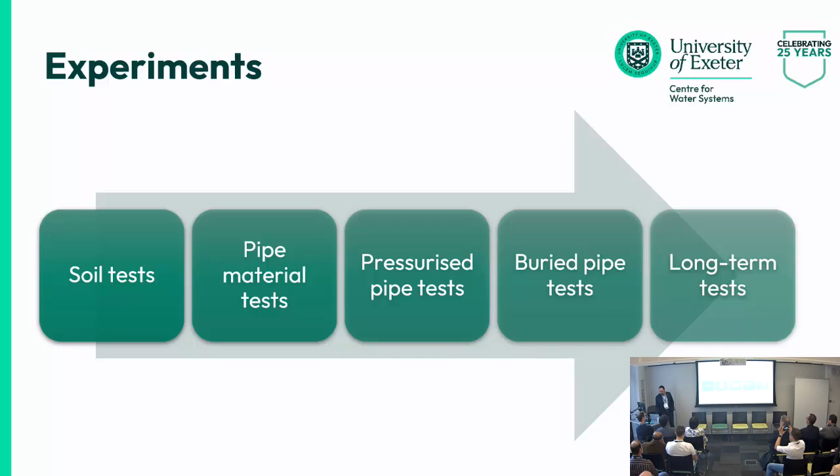We started with experiments, and in the first part we did some experiments on soils, pipe material, pressurized pipes, buried pipes, and then long-term tests. We started with tests on soil. We did some experiments to understand different mechanical or geomechanical properties of the soil, like soil gradation, shear characteristics of the soil, Atterberg limits of the soil, porosity, and different mechanical behaviors of the soil.

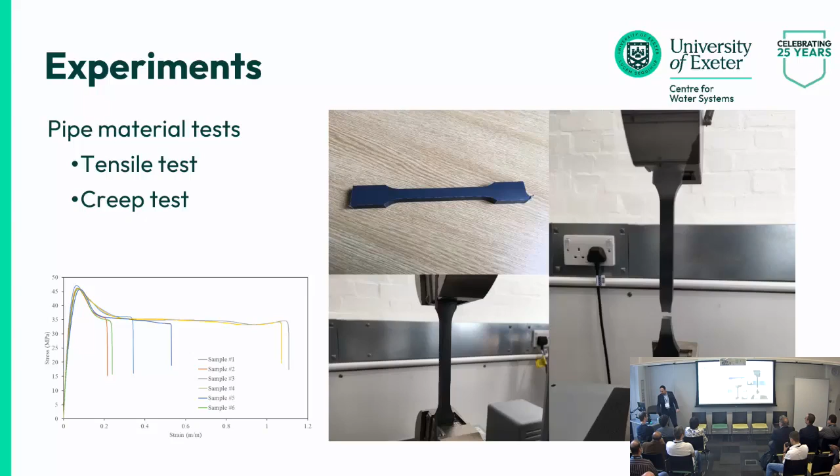Then we did some experiments on the pipe material. A tensile test has been carried out, and a creep test has been done to know the Young's modulus of the pipe material, yield strength of the pipe, and also rupture strength of the pipe. Then we moved to pressurized pipe tests. 4 sensors have been installed on 4 cardinal points of the pipe, and each sensor is able to measure the strain in 2 directions, both hoop and axial, and it can effectively measure and monitor the deformation of the pipe in different directions at different points.

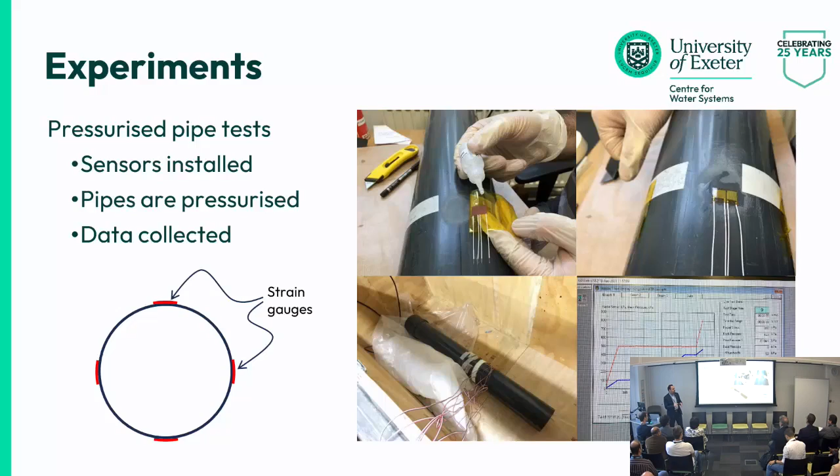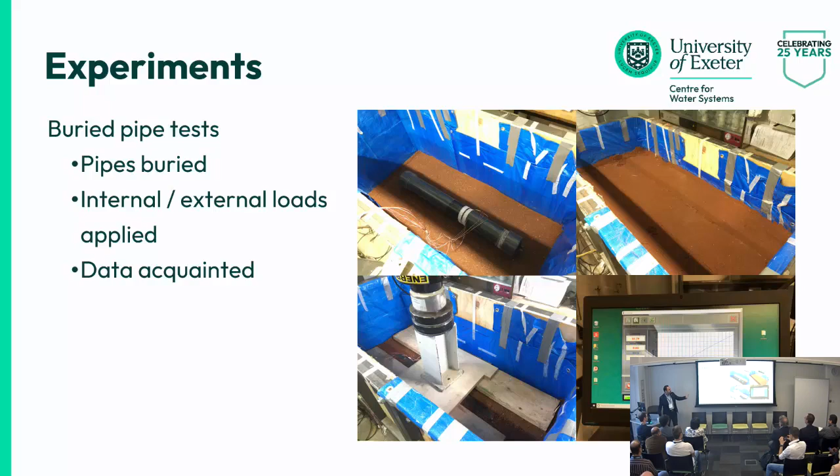The pipes were pressurized from inside, and the pressure increased until the pipes failed or broke, and then the pipes were buried in soil, and different combinations of internal pressure and external load were applied on the pipe until the pipe failed, to see how the pipe behaves when it faces different combinations of loads. And in all cases, the data, the deformation of the pipe, strains on the pipe were acquired. And some extra tests were done.

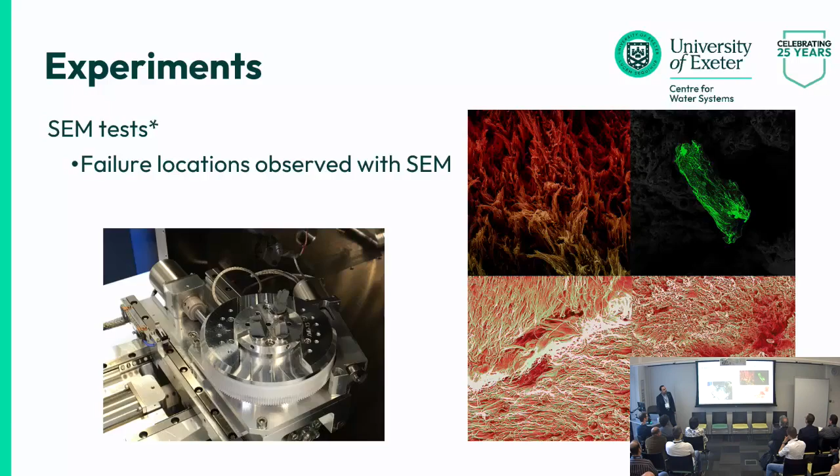The failed points of the pipe were cut and put under an electron microscope to see different failure modes on the pipe. Here we saw a ductile failure mode in the PVC pipe, and brittle failure mode in other failures. And here I have a short movie showing how we did the experiments in our lab in the Centre for Water Systems at University of Exeter.

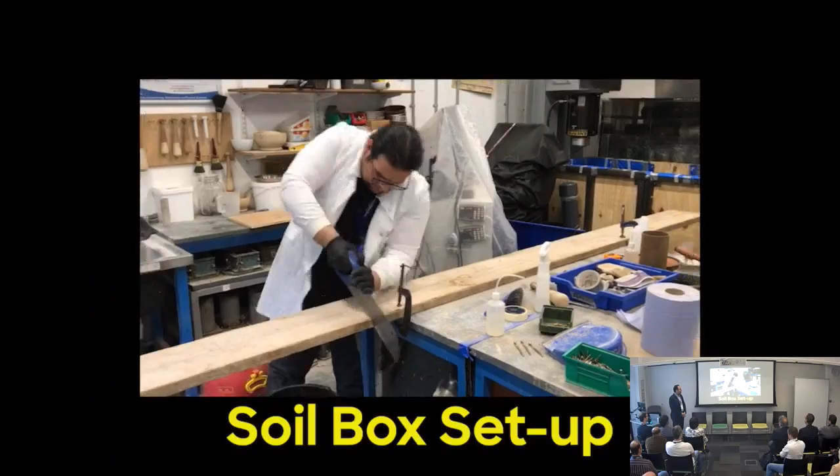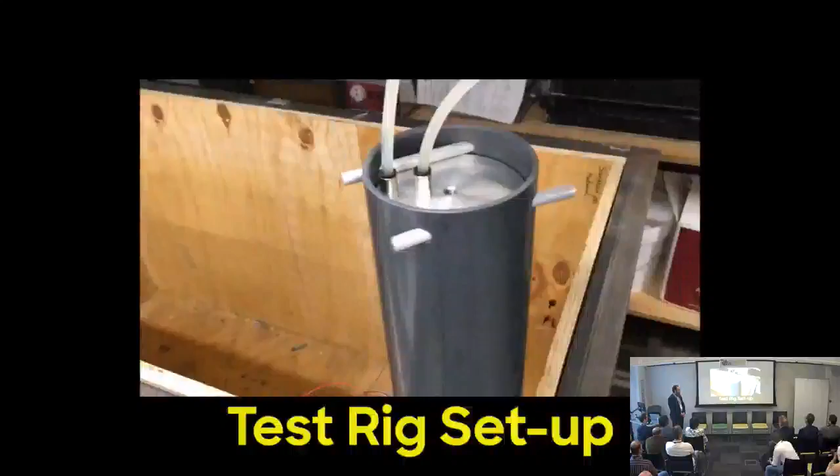We did some experiments on the soil, and here we measured the Atterberg limits. Then we cut the pipe, we sealed pipes from both ends, deployed sensors on different points, strain gauges on the pipes, and then we set up a soil box, and then we pressurized the pipes until the pipes were broken. This is one of the cases where the pipe was broken from one end. It was because of failure in the end cap.

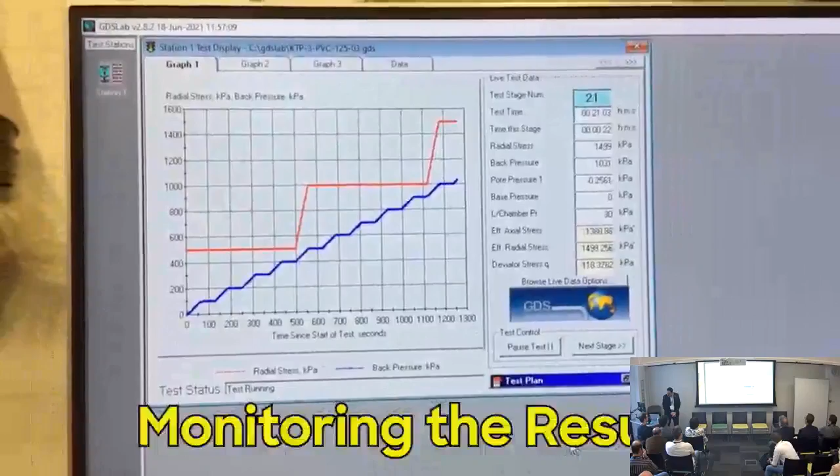And then pipes were buried in the soil, and the pressure was applied on the pipe, on the soil, and different strains were measured at different points. And our dedicated team at the Centre for Water Systems.

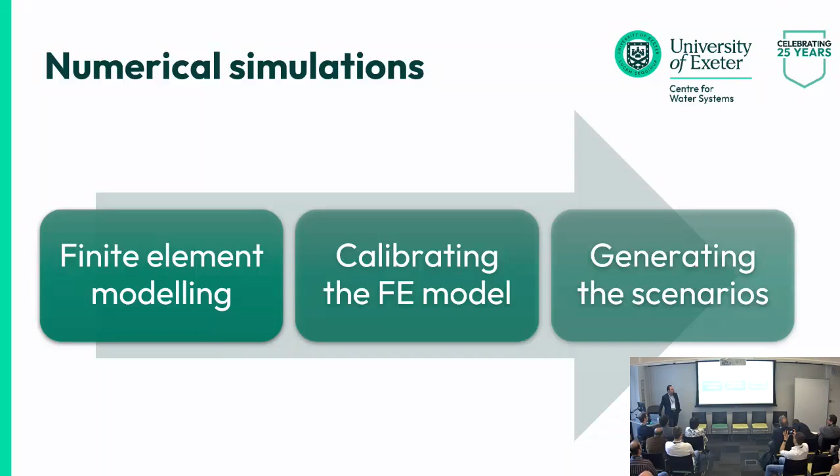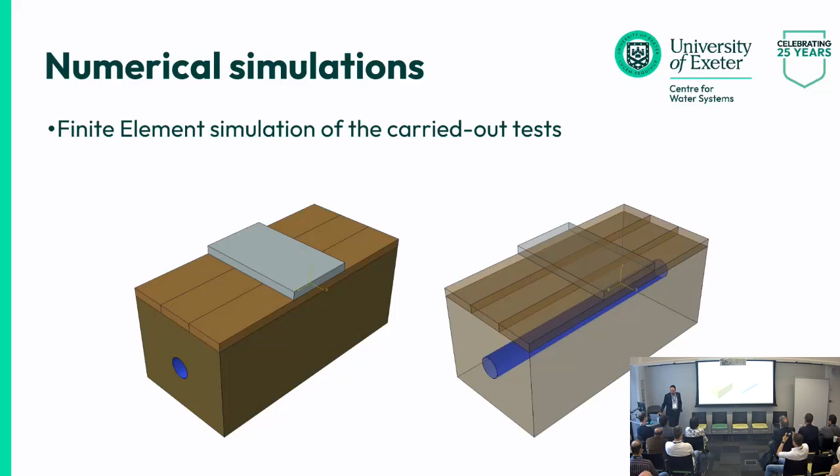Then we moved to numerical simulations. We started with finite element modeling, calibrating the numerical model, and then generating different scenarios. We exactly simulated what we had in the lab in terms of soil and pipe. And here I have another short movie showing how we did the experiments.

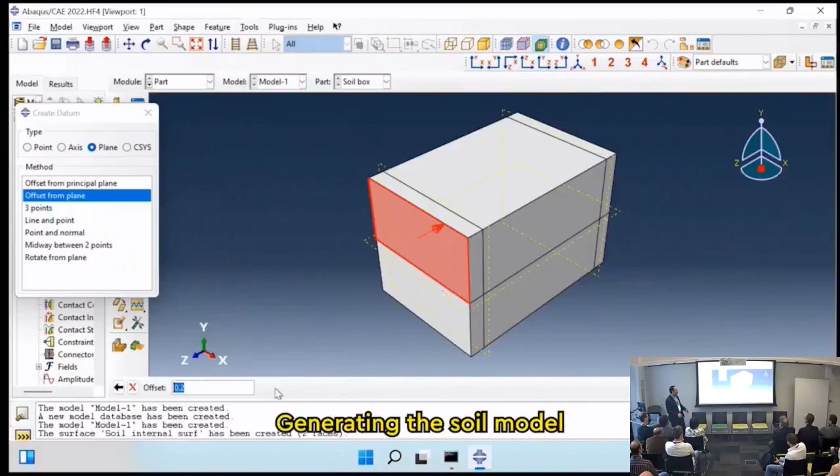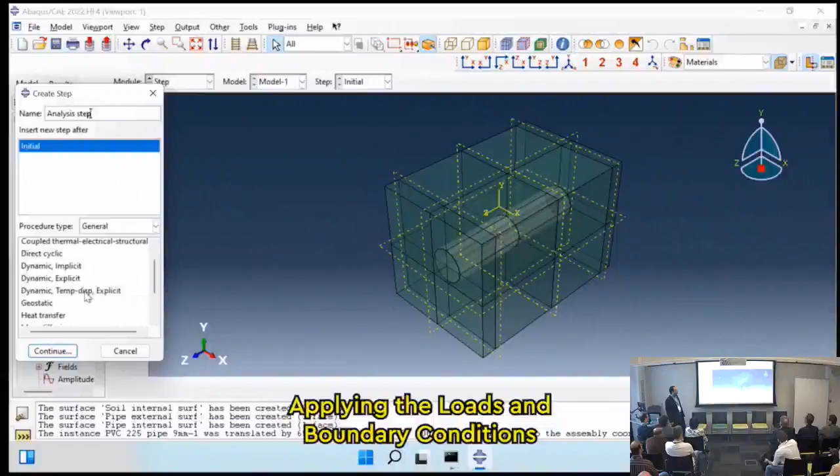The box of the soil box was modeled, the pipe was modeled, and the different characteristics of the pipe were assigned to the model. Then the pipe was put into the soil box. Then pipe is added to the model, and then loads and boundary conditions were applied to pipe and soil, and then the model was meshed.

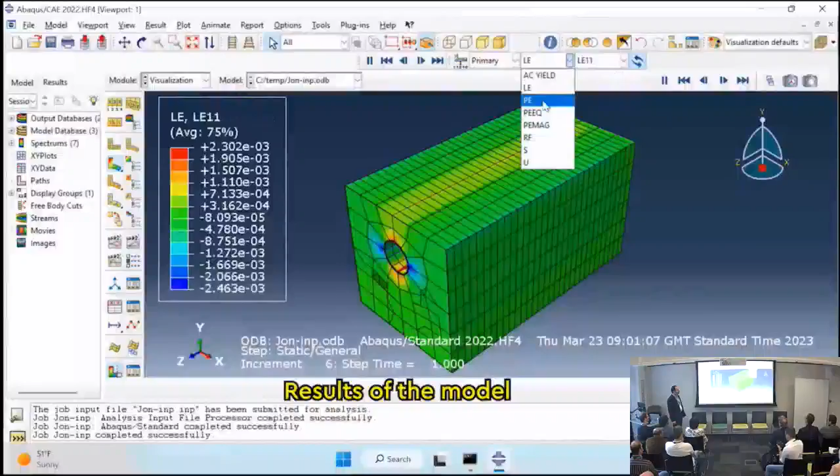Here the model is meshed, and then different parameters were assigned to pipe and soil, and the model was run. After running the model, we had stresses and strains on different points of the pipe and soil.

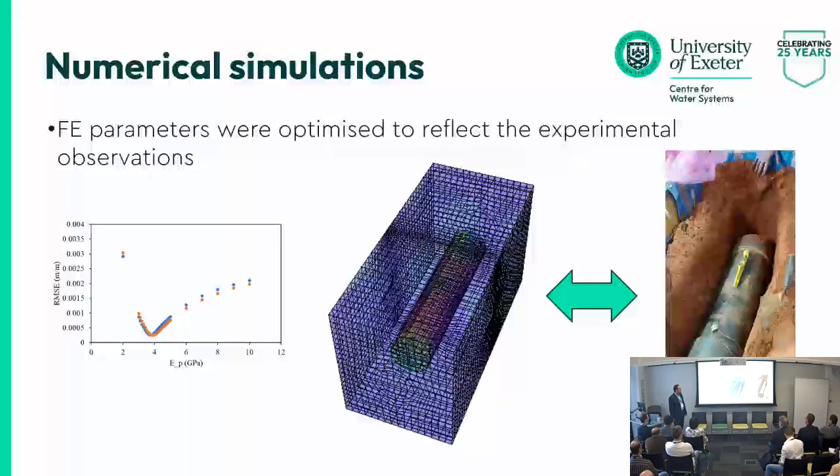Having this model, we were able to calibrate the numerical model with the data we got from experiments in the lab, and different parameters of the pipe and soil were calibrated. Now we have a calibrated numerical model of the soil and pipe, which is ready for the next step.

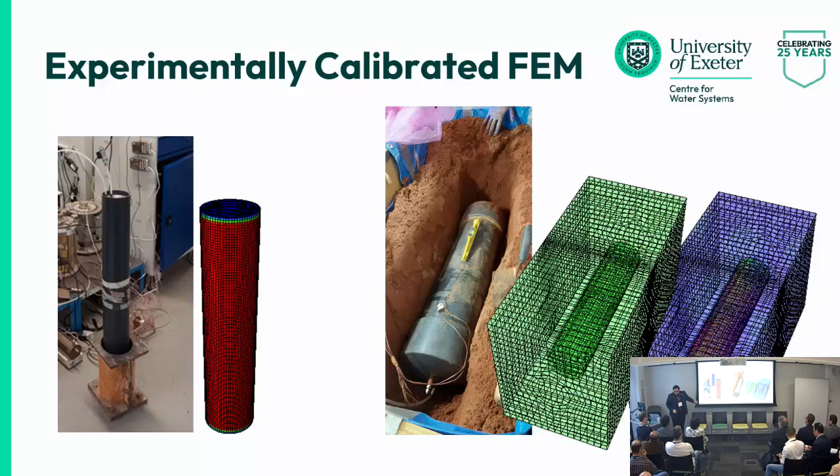We knew that running the finite element models, generating the models is time-consuming and computationally expensive. So we thought we can generate scenarios which could really happen in water distribution systems. So we have different diameters and the thicknesses corresponding to those diameters in the PN10 pipes, and also different buried depths for PVC pipes.

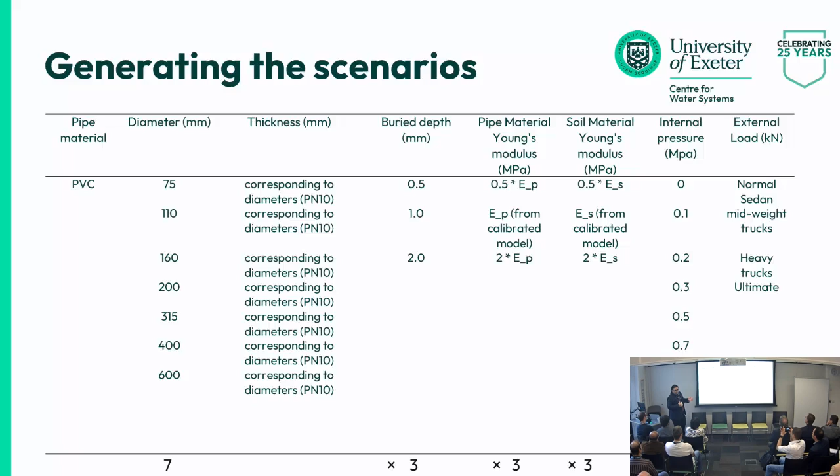Also, we multiplied the values of the calibrated Young's modulus of the pipe and also the soil, so that even if aging is going to affect the pipe, we are going to capture it. And also, we have different internal pressures and external loads. So we generate all of these scenarios, and then we create all of these models and run them. It is a huge time, huge computational expense.

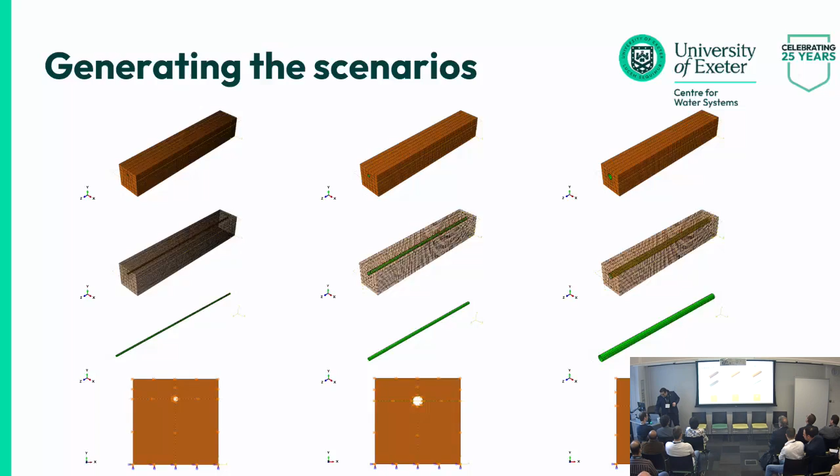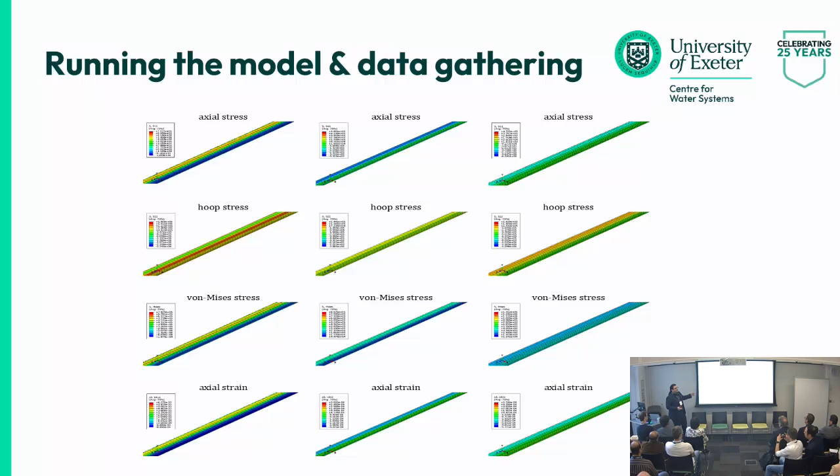And then we gather the data from the 4 exact cardinal points that we had in our experiments. So we have axial stress, hoop stress, von Mises stress, axial strain, and hoop strain in 4 cardinal points. And we got that data from all the scenarios. So we have this data from all the scenarios, what are we going to do?

We're thinking, let's make it a bit fast. So we're looking for the surrogate model, machine learning models, or let's say regression models to use. The first thing that came to mind is the white box one, because we know some of the empirical equations, and I really want to see the difference between the empirical model and the model we are generating from our finite element models.

And also a black box model, which has its own points. So at last we're going to have a surrogate. About the white box, it is obvious we have interpretability, model transparency, and also the feature importance that we can see in the equations. In the black box models, there is high predictive performance and automated feature learning, so it could catch some complex relationships between the features and the outputs. And it is very effective with large data sets.

As a white box one, we use EPR, which has been utilized several times in the Centre for Water Systems. It's a hybrid regression method of a genetic algorithm and least squares regression. So we use the genetic algorithm to optimize the coefficients of relationships. We used the data, and the main regression structure we thought of was a function using the features that we had the data from.

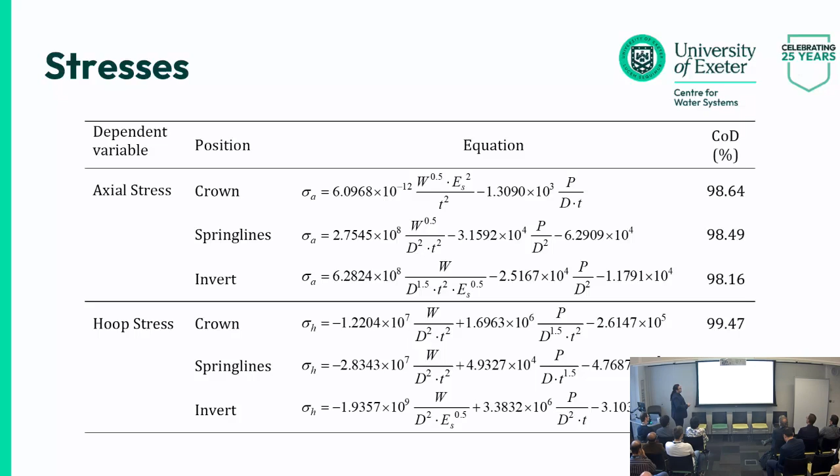So, we train the model. The model trained on the 3 cardinal points, that is crown, spring lines, and invert, for all the axial stress, hoop stress, axial strain, hoop strain, and we got the equations. As you can see, for each cardinal point, we have an equation: if you put the inputs, the features, you will get the output of the axial stress or hoop stress in crown, spring line, and invert, and also the coefficient of determination, R squared, is acceptable.

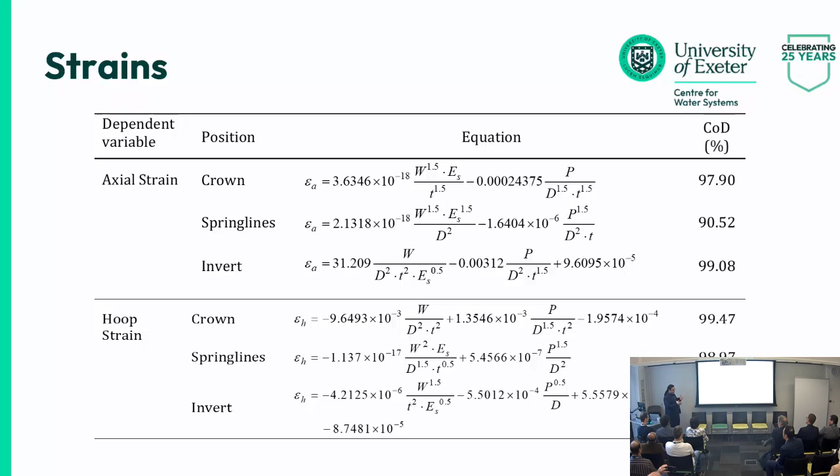And also for the strains, we have the same, and we don't have time to talk more about that. But when it is transparent, we can say how the effect of each feature that we use in the model or the experiments is affecting the output.

And also, we have this extreme gradient boosting, sorry for the name, it is the name. And we use this model, and we split the data for train and test. And the test shows good results, but this time there are several outputs, several inputs in the same model. It is not like EPR to have different equations for different outputs.

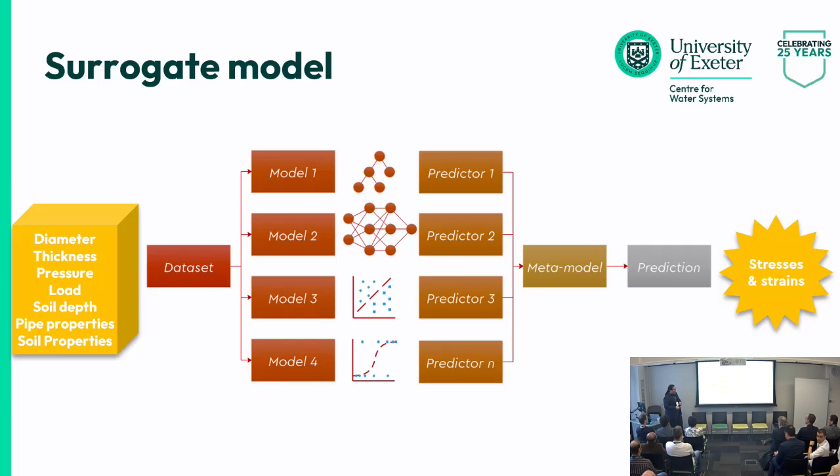Later, we have the surrogate model. So in this case, you will give the input features, and the input features go inside the machine learning, or let's say the surrogate model, and you will get the condition of that pipe by getting the strains output from the equations. So later on, it will come to the in situ data, which I'm going to ask Milad to come back and continue with.

Yeah. What we have presented up to now is what we have done in the project in the last 2 years, less than 2 years. But the next step is about gathering data from live pipelines in the water distribution network and monitoring them to develop a digital twin. We are going to gather strain data, pressure data, external load through load cells, and soil moisture, any parameters which could be effectively measured in water distribution networks.

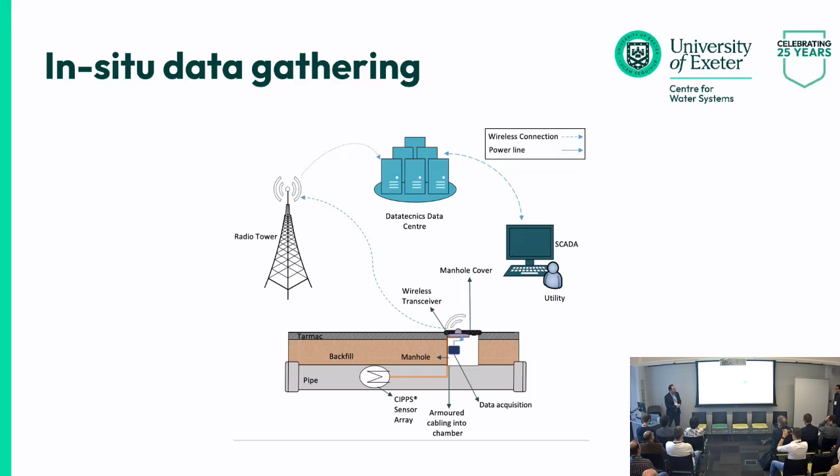And yeah, the whole system could be something like this. The parameters will be measured on the pipeline, and then the data will be transferred to a cloud, and the cloud will send the data to our machines in the university or in the company, and then we will have all of the data in our machines to monitor the pipelines in real time.

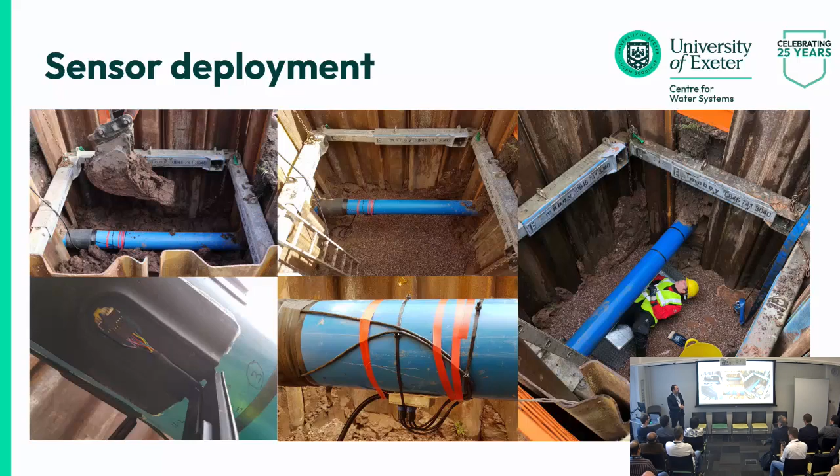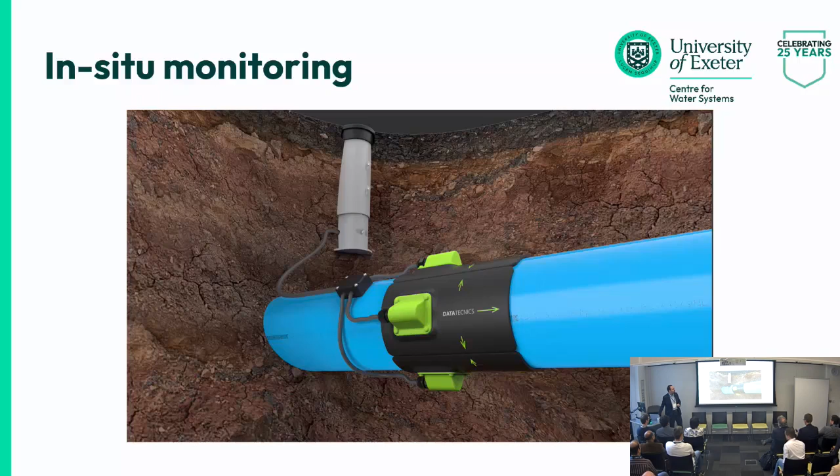And fortunately, the company we are working with, Datatecnics, has a lot of experience in deploying sensors on pipelines in the UK. This month we are deploying strain gauges and other sensors, pressure gauges, on pipelines in one of the utilities in the UK. And as of next month, we will be able to have those data in real time in our machines, and the next step would be developing the digital twin. And the company benefits from a high-tech solution for deploying sensors on the pipelines.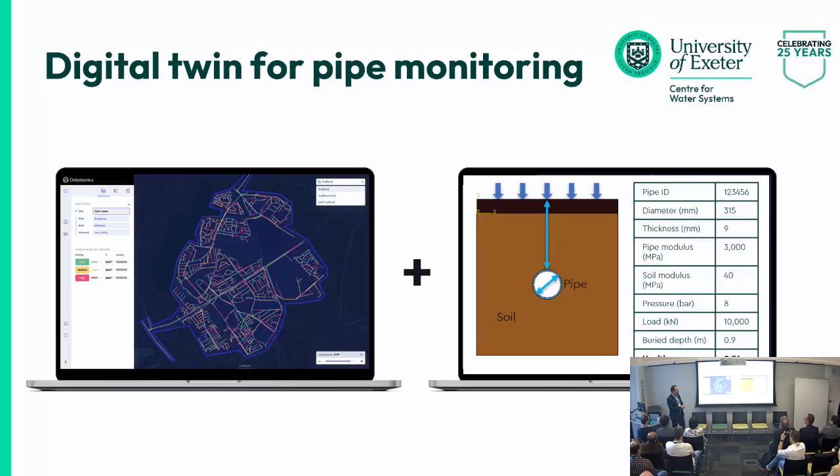And the next step is about developing the digital twin for water pipelines. Having this model, we will be able to monitor the pipes and have all of the data about the pipe: diameter, age, length, thickness, depth of the pipe, everything like that. We will have a health condition score for each pipe, and we can monitor it day by day, and we can predictively replace the pipes before they fail.

So we can shift from reactive asset maintenance to predictive asset maintenance. This is the next step for the remaining 1 year of the project, of the case project. Thank you very much.

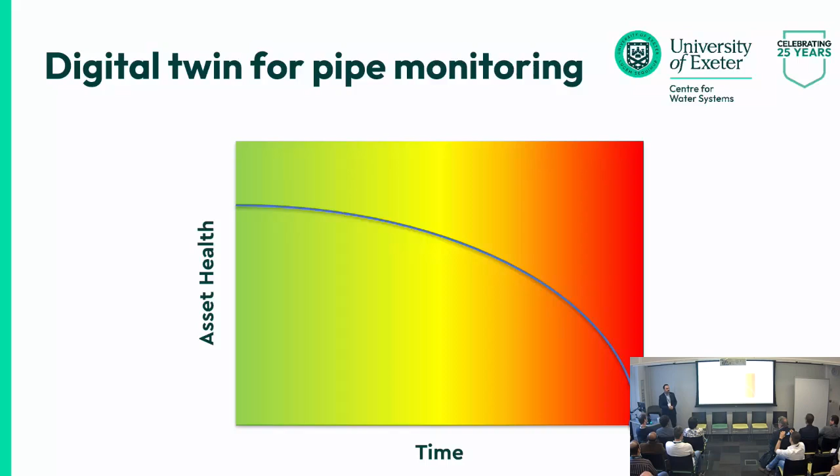How general are your results if you only worked on plastic pipes? We started with PVC pipes, but at the same time we are doing tests on ductile iron pipes, and the next step is cast iron pipes. So we are trying to cover a wide range of pipe materials in our project.

Okay, looks really great. Have you looked into similar work abroad? There is just a little research done exactly on this subject matter, but yeah, we had a literature review on this part, and also we are happy that we saw that KWR did something in this field.

Model that... yeah, exactly the same. Thank you. Yeah, thanks for the presentation.

You went through the digital twin rather quickly, and I was just wondering, we all use this term in a very loose way, and different people mean different things by digital twin. How do you define a digital twin in your case?

Actually, the definition of digital twin is a bit broad. But when we're talking about the digital twin, it means that it should be dynamic. And it should be representative of the same thing in the field, so we could do some non-destructive tests in our computers to look at what is going to happen to that pipe or to that asset

So our next speaker is Matthew. Matthew's research has also been funded by industry, and the focus is on leakage prediction. So my name is Matthew Hayslep, and as Raziyeh just said, I work with South West Water to use machine learning to look at DMAs and leakage primarily.

So, some of the ways that we typically try to understand leakage that we want to look at from a data perspective. We've got minimum night flow, which you can generally see only at an entire DMA level, but the data is everywhere. There's lots of it, but it also includes legitimate demand. And then we've also got pipe failures, which are very pinpoint locations, but they're rare events. Sometimes you might have a whole year where the DMA doesn't have any, but there's still leakage there of some description. And it's also only what we can already detect, whereas we want to go beyond and see what there is that we don't know.

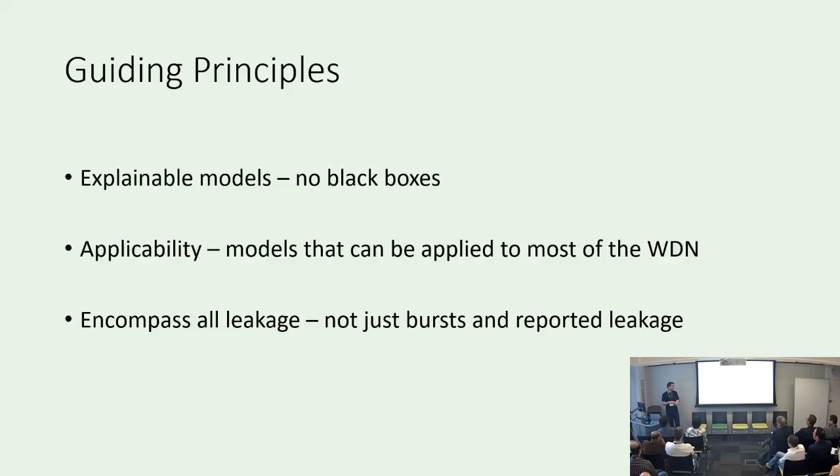And there's a couple of guiding principles for our work. We want to use explainable models because we're working with industry. We want to be able to understand the models that they're using. They obviously have Ofwat that they need to report to, and we want to make sure that what we make is applicable to as much of their network as possible, not just for one particular DMA, one case study. And we want to not focus just on bursts and reported leakage, but possibly also unreported and background leakage as well.

So, with that in mind, some of the data that we use, it is animating, excellent. So we have about 800 real-world DMAs from South West Water, about 11,000 kilometres of pipe. We look at minimum night flow records for a whole year. Now this is normally time series data, but for us, the way we started was to start simple. So we just reduce that down, basically take an average minimum night flow for a DMA for a whole year, and we'll get to that in a minute.

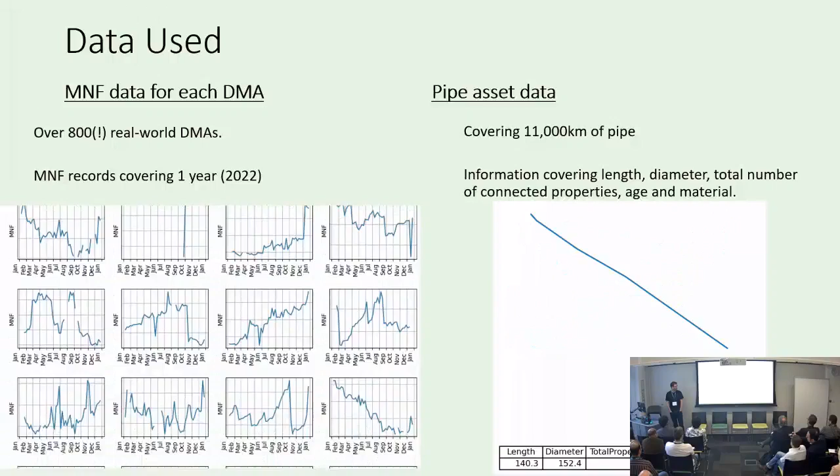And then, for now, we're just looking at pipe asset data. So we've got length, age, diameter, material, and total number of properties that are connected to that pipe as well. And what we want to try and do, like I said, is just starting simple, try and predict some average historic minimum night flow, right?

If we can use the asset data to sort of say, this is roughly how much minimum night flow we're expecting, then we can kind of explain some of the differences. Why does this DMA have more minimum night flow than this DMA, right? And then we can try and drill down further into leakage.

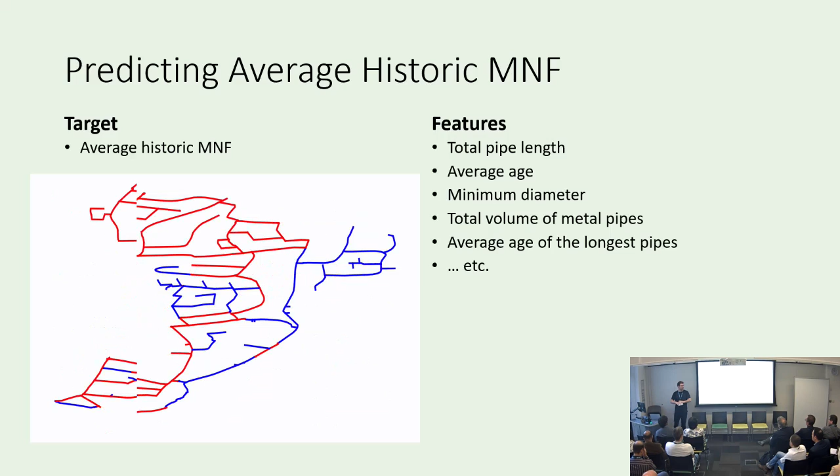So what we started with was making a whole bunch of features because we start with the pipe data, but the thing that we're trying to predict is at this DMA level. So we look at things like total pipe length, average age, minimum diameter. We made something like 200 handmade features to try and do some machine learning on. And so the first attempt that we get looks something like this. We trained a very simple linear model, so it's nice and explainable.

So as a follow-up to this, we did a piece of work with genetic programming, where we wanted to try and find some kind of minimal set of features that we could use to do the same experiment, basically. And we got very similar results with only these 5 features. And we won a Best Paper Award at GECCO a couple of months ago for that work.

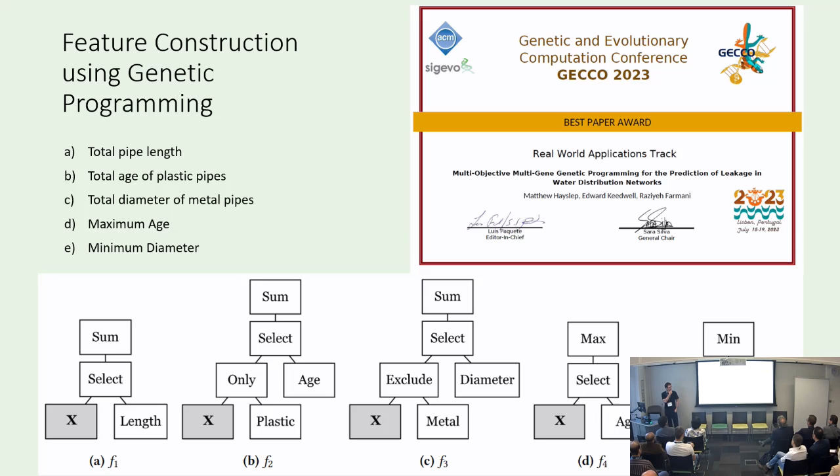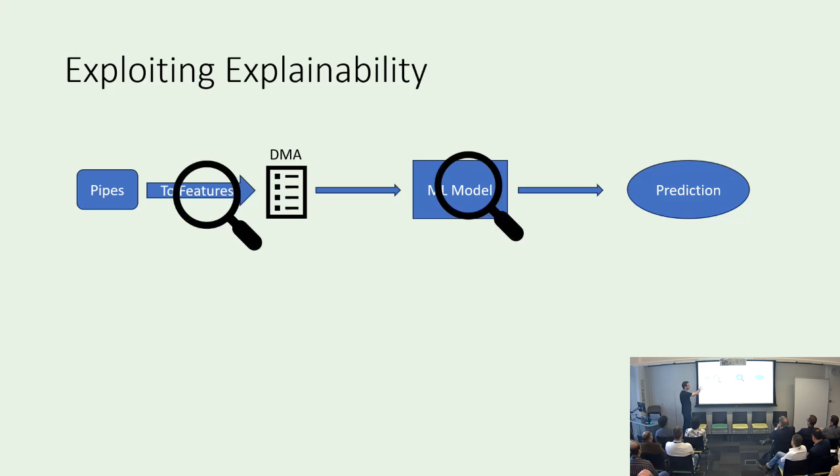And this brings me on to the explainability. We wanted to try and exploit this because we know exactly how we go from our pipe data to our features, and we know exactly how we go from our features to our prediction because we're using a linear model. And can we exploit that to improve the capabilities of what we're doing? So we kind of combine this to say we know how responsible each pipe is for each feature, and we know how important each feature is for the prediction.

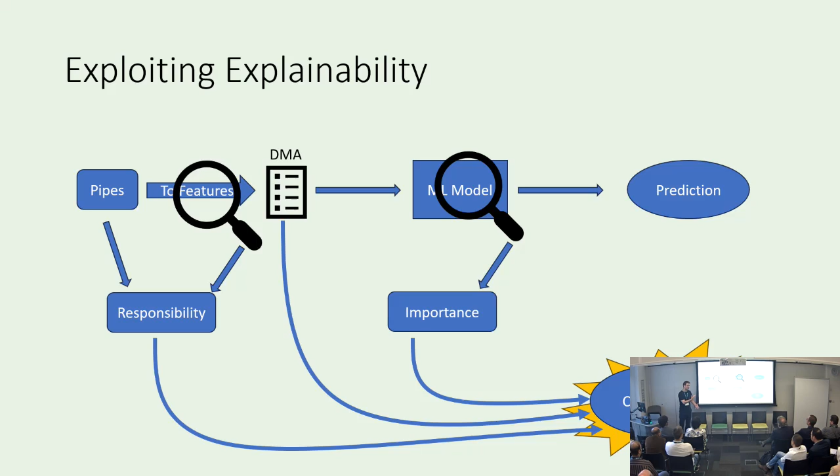And we combine that into what we call the leakage contribution score, which is a number for each pipe which tells us how much it's contributing to the leakage in a DMA. And the convenient property of this is that if you sum up the leakage contribution score of every pipe in the DMA, it's roughly equal to the original prediction.

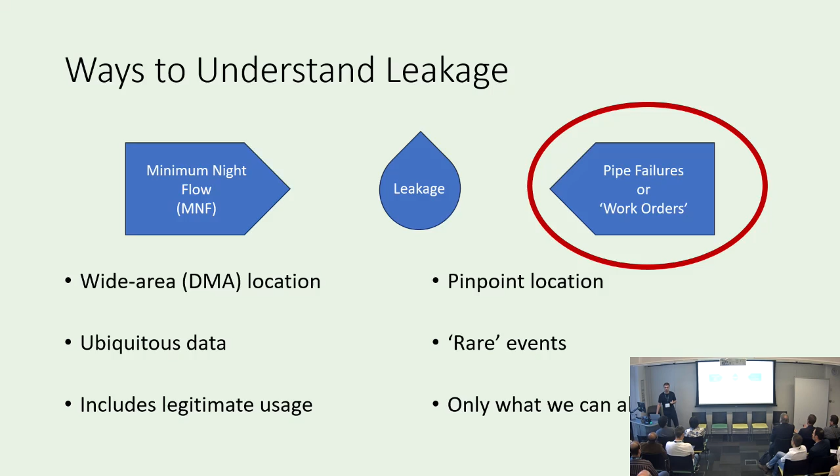But how do we test this? Right, we've got a little bit of a problem, so we go back to pipe failures. We look at repairs and replacements because they have pinpoint locations, so we can attach them to pipes. And we do a classification problem now. It's a different machine learning task. So was a pipe repaired or replaced in the same year that we're looking at the minimum night flow? And then we can use this leakage contribution score as a comparison to other models that we've made.

So we wrote a paper about this, and then immediately I went back to this kind of mental model that I had, and I thought, what if we just scribble all of this out? And what if we can just go and skip all of that part and go straight from pipes to leakage contribution score, basically.

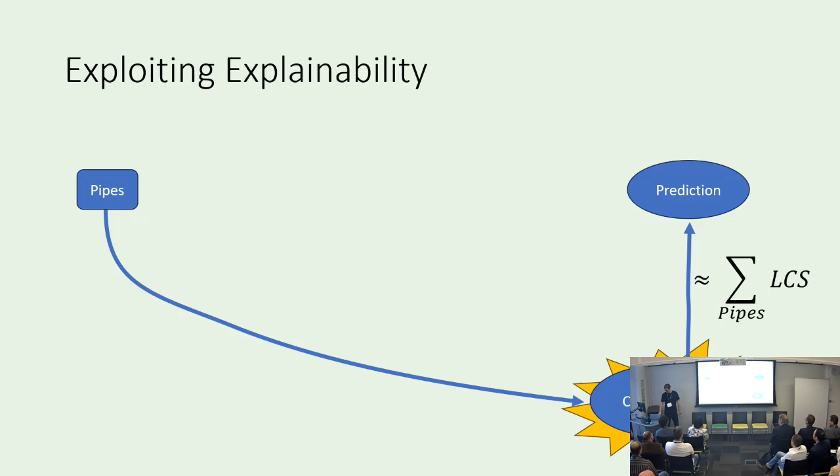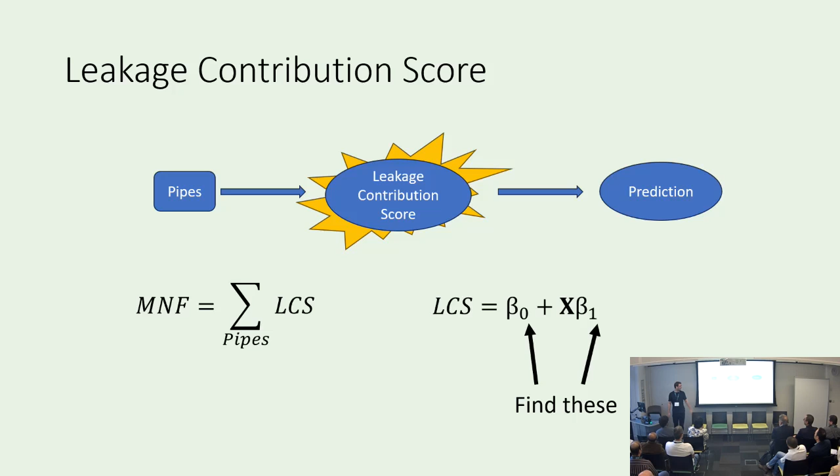So we kind of formalised that and said, okay, what if we say the minimum night flow is exactly equal to this leakage contribution score that we want to find for each pipe, and then we say, okay, we'll keep it simple for now. Leakage contribution score is equal to the linear regression equation. Nice and easy. Now, it's a lot more complicated finding those coefficients than it might seem at first glance. If you want details, poster number 6.

But it worked. The minimum night flow predictions are not quite as good as the previous model. As you can see, we've lost about 0.2 in our R-squared, which is quite a lot. But I think that's mainly because we're losing some information. Instead of looking at the whole DMA, the model's now looking at each pipe in isolation. So you're losing out on relationships there that we want to try and capture later on.

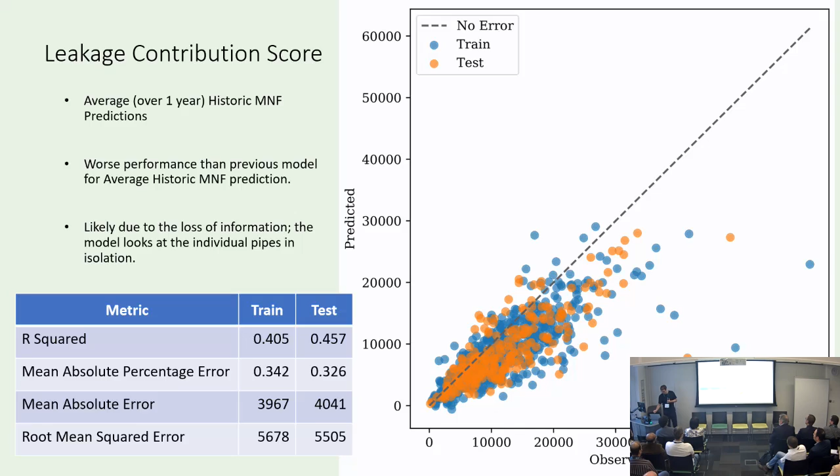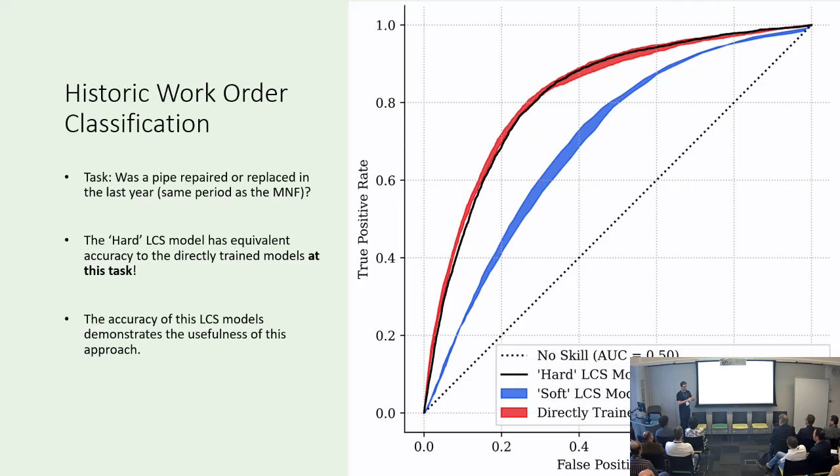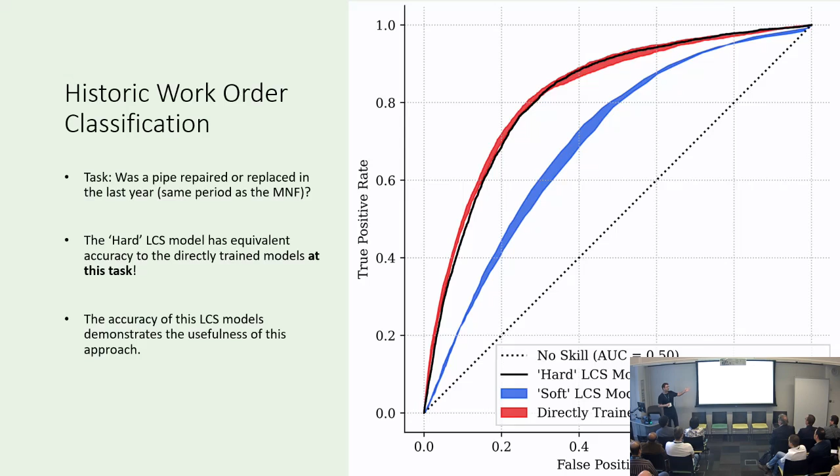However, the black line here is our ability to now predict pipe failure, right? So we're now as good as models directly trained to do that problem. Not only that, we're actually, strictly speaking, predicting how much minimum night flow each individual pipe is responsible for in a DMA. So we've managed to kind of increase the resolution in a particular way. And really this is our only way of validating whether or not we're actually doing that, because it's difficult to measure.

So I feel like I've gone quite quickly, because this is my summary: we've been able to essentially go from just minimum night flow to create a model that can predict both minimum night flow and pipe failures. And that's obviously important for areas of the network and DMAs where you don't have many pipe failures, but you still have leakage and you still want to know what's going on.

So I expect many questions. Yes, please.

Have you got any information about whether people have opened up pipes and tested them for background leaks? Do we have any idea, is it most pipes have a little bit, or is it just some pipes? Do you have any sense of what that looks like? Yeah, my understanding is that most pipes have a little bit, but it might be tiny little drips. I can't think of the right word, but it's just leaks and seeps, basically, from stop taps or junctions and seams and things like that.

And then maybe that correlates with age and pressure and a lot of other things that we're not looking at the moment. So I would have thought that most of the pipes should have a positive number of some description. It should all contribute some amount, even if it's very small. And this seems to work with one of the most important features in basically all the work, which is the length of the pipe. If you've got more pipe, you get more leakage. It's pretty obvious. But that backs up the thinking that you essentially have a per meter amount of background leakage that you should expect.

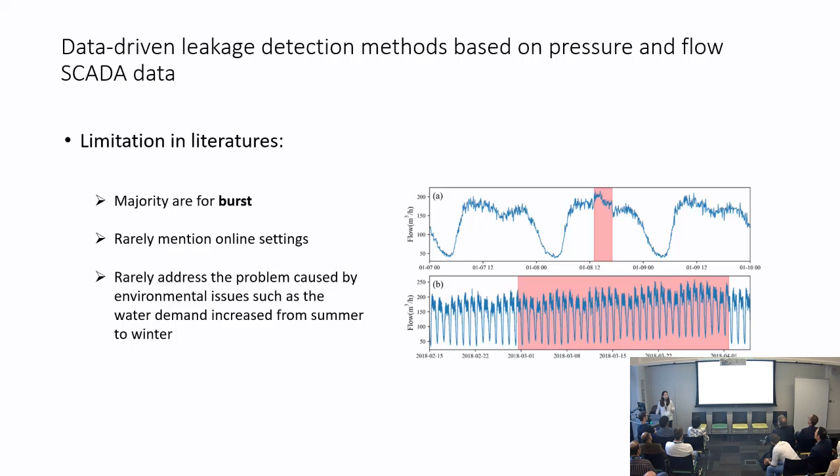So how to detect it? Not to mention that there are global trends in the data itself, for example, water demand changing between summer and winter. I sincerely apologize for that. And this can also obscure the existence of a gradual leakage event.

So our first work, published early this year in the Journal of Hydroinformatics, is based on a statistical method and a purely online framework to detect these gradual leakage events. The online leakage detection system is based on a statistical method called the EWMA-enhanced Tukey method, and involves robust statistics, which are robust to noise and uncertainties in the data. It can also adapt to the time-varying characteristics of the flow monitoring data, such as demand increasing from summer to winter, as we mentioned before.

And this method has three subsystems: the pre-processing, online detection, and also a feedback control to control which part of the data is what we should use to update the model and which part of the data should be abandoned.

So this is the results, and we applied our method to a synthetic case study, which is the L-Town network published in 2020 in CCWI. It should be noted that even though this is a synthetic data set, this network is created based on a real town in Cyprus. So every node has a year of demand pattern with lots of uncertainties and noises.

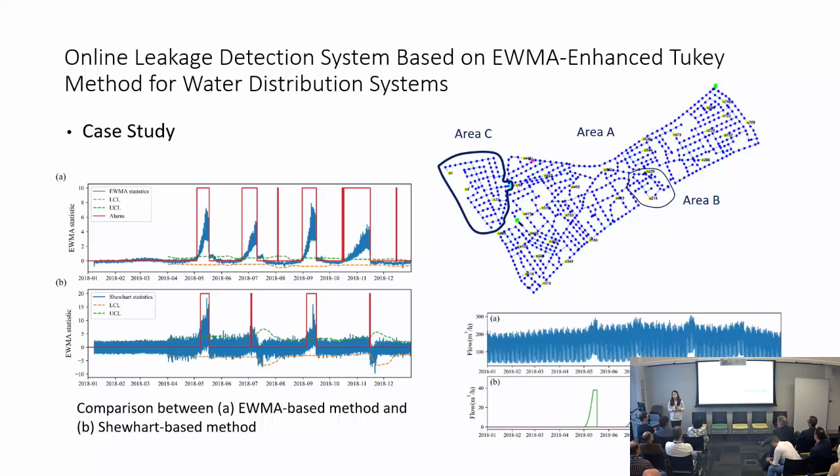The results show that the proposed method has highlighted the existence of gradual events and burst events, and also the time-varying threshold setting strategy has adapted to the uncertainties in the data and greatly eliminates the opportunity of false alarming.

However, due to the limitation of the statistical method we proposed before, it has some accuracy limitation. It's not as accurate as the data mining models, the state-of-the-art methods like machine learning neural networks. So we propose a new method based on machine learning to learn the data pattern automatically instead of using the mean or deviation or quantile or anything else that the statistical method used.

And in order to highlight the existence of gradual leakage events, we first extend the prediction window. Instead of using the traditional 1-point forecast, because it doesn't have any historical memory, you only highlight the existence of the abnormal value at the current time, but it doesn't have a time window memory. So we extend this, and we use a neural network to create a mapping function between the input and output.

For every time step, we generate a pair of observation and prediction, and then we tried lots of distance calculations like Manhattan distance, Euclidean distance, and then we found that cosine distance is the most robust one to highlight the existence of leakage while minimizing the pattern of false alarm.

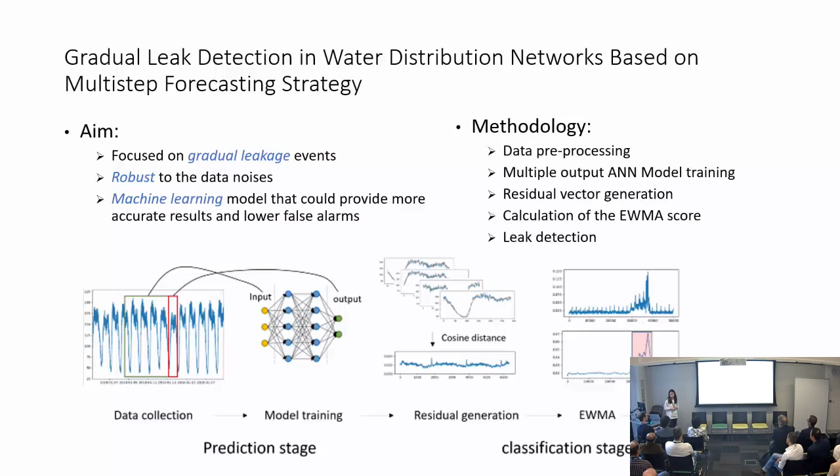And then after the residual generation, we get the residual vector like the top figure on the right-hand side. It can be seen that there are some sudden spikes in the error residual. This is because of some unexpected noises and unexpected user behavior in the data, and the prediction model is not perfect all the time. So at this stage, we need EWMA to smooth the data set while maintaining some historical information as well. And at the last stage, the threshold setting will be static because the abnormal events have already been highlighted.

This time, instead of using 4 or 5 gradual leakage events, we create 6 leakage levels. Each level has 100 gradual leakage events. It increases, starting from 0.2% daily increase of leakage flow relative to the daily consumer demand, to 1% of the daily consumer average demand.

We can see that at leakage level 1, the gradual leakage events cannot even be seen by human eyes. Only when it reaches level 6 can it be seen after it's fixed. If we cover this, it's hard to distinguish that anything happened. So it is crucial to detect it before it reaches its maximum level and creates consumer complaints.

The left-hand side figure shows the comparison between the traditional one-step forecasting and the multi-step forecasting approach we proposed. It can be seen that the traditional one-step forecasting model will consider the gradual leakage events as a normal scenario, and it will gradually adapt to it. It doesn't show any abnormal behavior in the residual generated.

Unless at a very large leak level, at the end when the leak stopped, there is a sudden decrease or sudden increase in the flow, it will get some error, but at that time the leakage has already been repaired. So alarming there is useless.

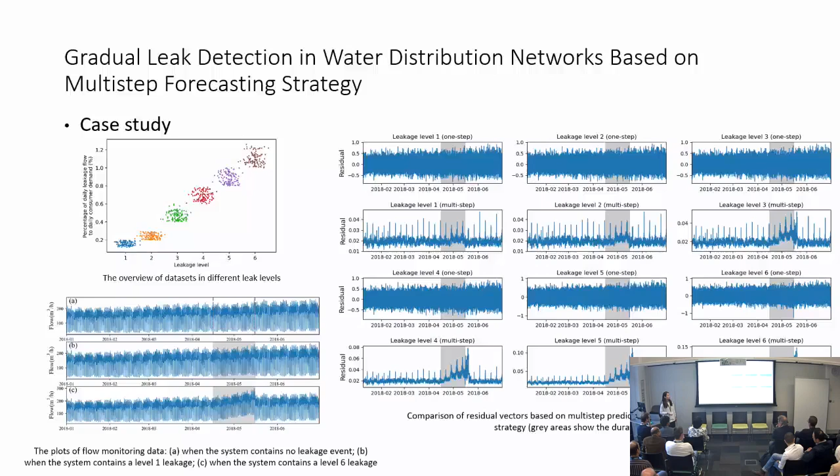So after we did smoothing and threshold calculating, we can generate the final ROC curve. It should be noted that we couldn't reach the top, like 99% or 95%, because at a very early stage of the leakage, it only has like 0.01 or 0.02% of the daily average flow. It is impossible to raise an alarm there because the leakage is not even larger than the data noise itself.

So with different leakage levels, we have tried our best to detect all the abnormal points as we can. And the red star shows where the 3 sigma threshold is set. It can be seen that with the 3 sigma rule, lots of false alarms have already been reduced, and we reached our best TPR.

And then we applied our method to a real case study, with data we collected from Severn Trent Water. There is a gradual leakage event that happened in November 2021. Because this time the gradual leakage event is pretty huge, even the one-step prediction model has some error at the end. But still it shows that our model performed better than the traditional one. And this paper was published early this year in the Journal of Water Resources Planning and Management as well. Thank you.

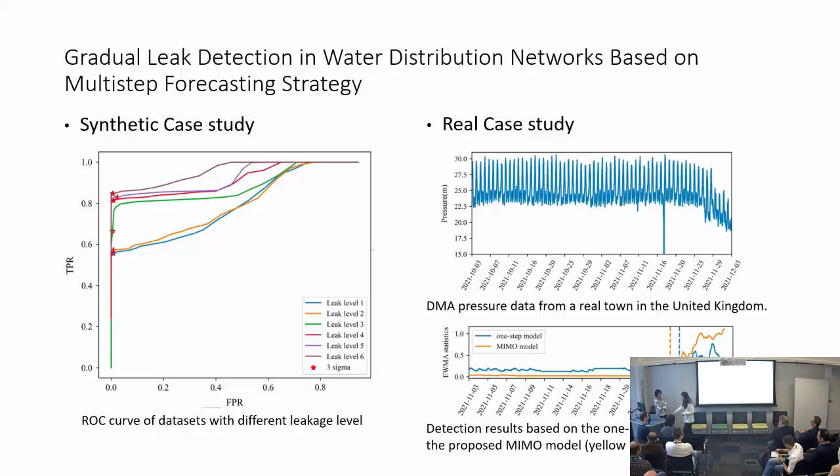And back to the first question, I got that question from multiple reviewers several times, and I studied all those BattLeDIM papers as well. First of all, I didn't use as much information as they have. I only used flow data, and I didn't use pressure sensors or smart meter sensors or anything else. This is only based on flow sensors. And also, the original BattLeDIM created a data set with simultaneous leakages, but we don't have that. So here, only one leakage happens at a time.

In their case, simultaneous leakage happened all the time. Like maybe there are 2 or 3 leakage events happening at the same time, and I have to confess I'm unable to do that right now. Because first of all, we didn't use that much information. Second of all, yeah, that's all.

I didn't use that. And also, I looked at some papers, and what surprises me is that this is online leakage detection. So all the data happened after. The algorithm runs forward like this, and some of the methods are actually using the information after. They are getting the group of data and getting rid of the trend, getting rid of the seasonality. But I didn't do that as well.

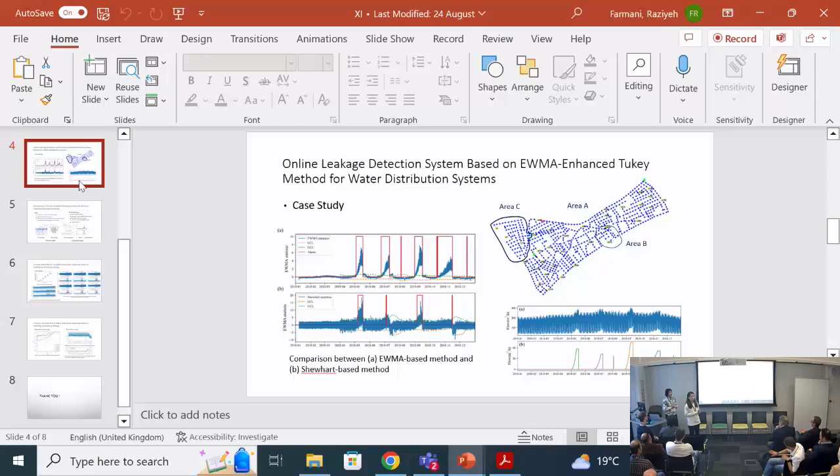So yeah. And just to add to that, we presented some initial results to different water companies, and the first thing they were saying is that we don't have that much information about our system.

So basically thanks for being here. I am Varshith, first year PhD student, and Professor Raziyeh is my first supervisor, and Professor Peter is my second supervisor. First of all, I need to give a heads up. I am not using any artificial intelligence here, just human intelligence and my laptop to get my work done.

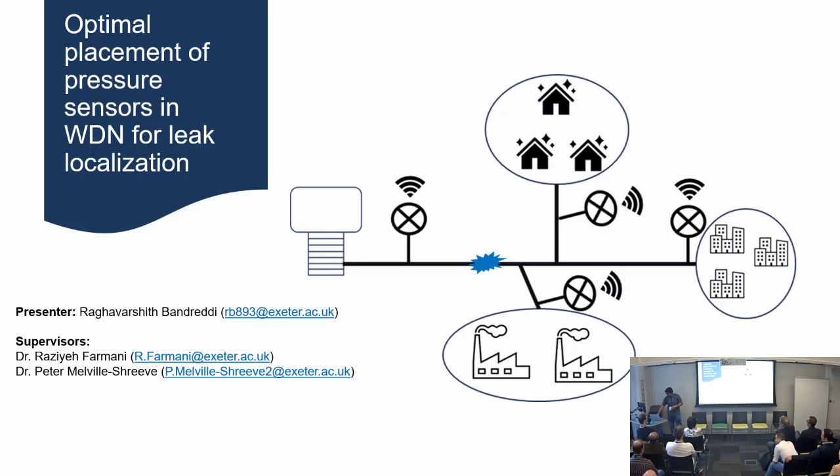Here is the topic which I'm going to discuss, that is optimal placement of pressure sensors in water distribution for leak localization. If we look into the existing problem, one of the major problems faced by the utilities, especially in the developing countries, is leak management. And if we look into the numbers, I had an opportunity to work with real case studies when I was working with Hitachi in the past.

The actual leakages, even in relatively new networks, in certain DMAs, went up to 45% of the bulk supply, which has been a major concern for the utilities, but they don't really disclose it. When we went to estimate the leakage levels in the system, we told the site engineers, okay, you have a leakage of 45%. The site engineer said, okay, please reduce the number to 25 when you say it to the chief engineer, because he would be mad with us. Likewise, there are many issues with leakage.

What we can do is, one of the most efficient methods is to pinpoint and repair existing leaks, but the major challenge here would be to search the entire area to pinpoint leaks and then repair them, which makes it very infeasible for the utilities, both in terms of money spent as well as the time required, given how large the DMAs could be and how expensive the technical labor is to do that particular leak localization.

What can be done to improve this approach is, we can provide ICT solutions to localize leaks and reduce the search area, maybe utilizing sensors, thereby reducing the time and effort to localize and pinpoint leaks, and thereby help in the leak management process. A few of the popular methods we know are hydraulic model-based methods and data-driven methods, etc.

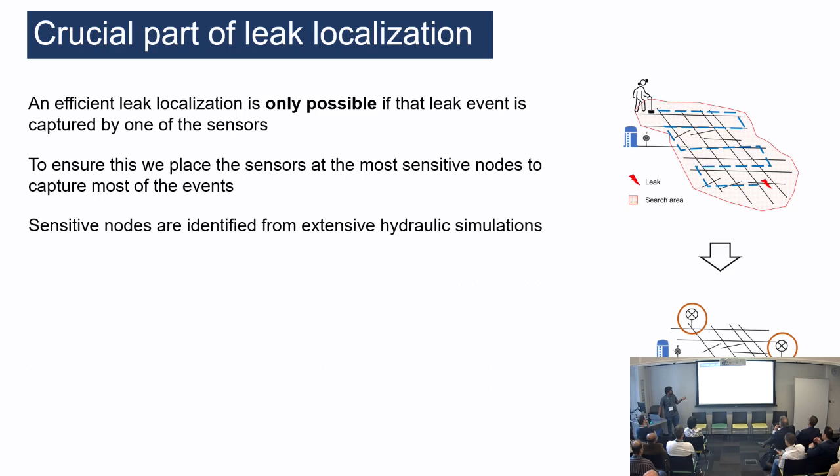To ensure that, we generally place the sensors at the most sensitive nodes to capture most of the events. To identify those sensitive nodes, we perform extensive hydraulic simulations. But the challenge is, will these sensitive nodes have the same sensitivity forever? As we know, since we are using pressure sensors here, both demand and leakage have similar impacts on pressure.

And in recent times, pre-pandemic and post-pandemic, we have seen a shift in the consumption patterns because of the work from home paradigm or stay-at-home activities. So those sensors that were designed using sensitivity analysis or similar approaches, maybe in the pre-pandemic time, might not perform as desired when we use them now or during the pandemic times.

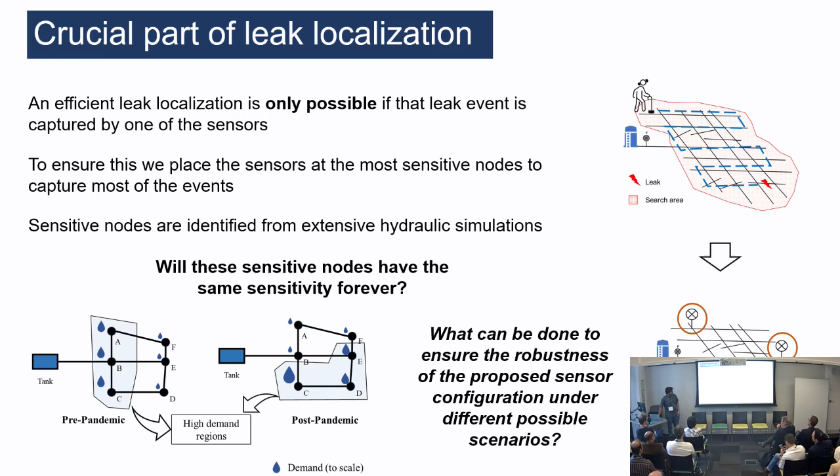What can be done to ensure the robustness of the proposed sensor configuration under different possible scenarios? So we came up with a sampling design methodology for optimal sensor locations, and the key features for robust sensor configuration, which we think are, first and foremost, the most famous approach: finding nodes with high sensitivities for sensor placement.

Second is placing sensors at nodes with higher topological importance, using how the network is spread and just the network connectivity. And third one is maximizing the spatial coverage of the sensors in the water distribution.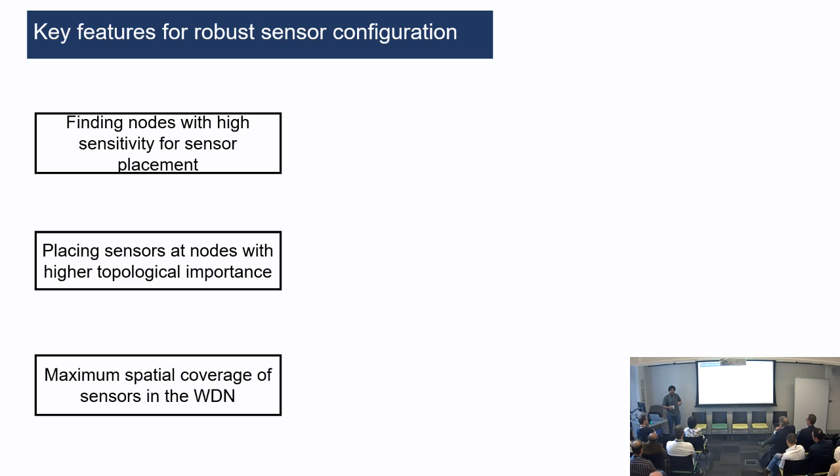When we went to the utilities, they say, okay, we can only afford 3 sensors. Usually they go with the bargaining thing. If you say we need 5 sensors, they would be like, we can't really afford 5, so can we get you to 3? When we say 3, okay, fine. Then we'll say, okay, spread it across. Then if we are insistent saying like, if we place the sensors in a certain area, we can get most of the information, they would be like, no, we want to use it for other purposes also. So please maximize the spatial coverage. For that reason, we introduced this explicitly here.

For finding the sensitive nodes, we did a thorough sensitivity analysis, simulating leaks of size ranging between 0.5% to 8%, though 8% seems to be a burst, but then we did so. And identifying those nodes with higher sensitivity, which are impacted with maximum pressure deviation when those events have occurred. We identified such nodes.

To find the nodes for the other two objectives, we used graph theory based approaches, where for the second objective the betweenness centrality of all the nodes is calculated for an edge weighted graph. For consistency, the edge weights used for the graph are the pipe lengths, and basically the nodes with higher connectivity to the other nodes are identified.

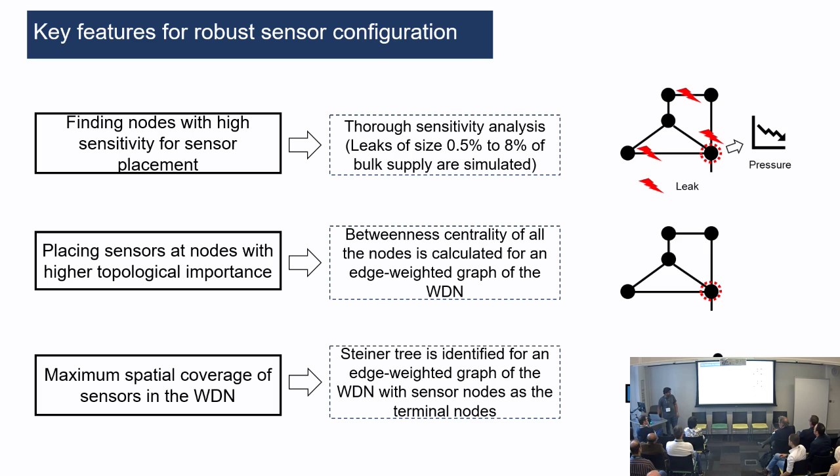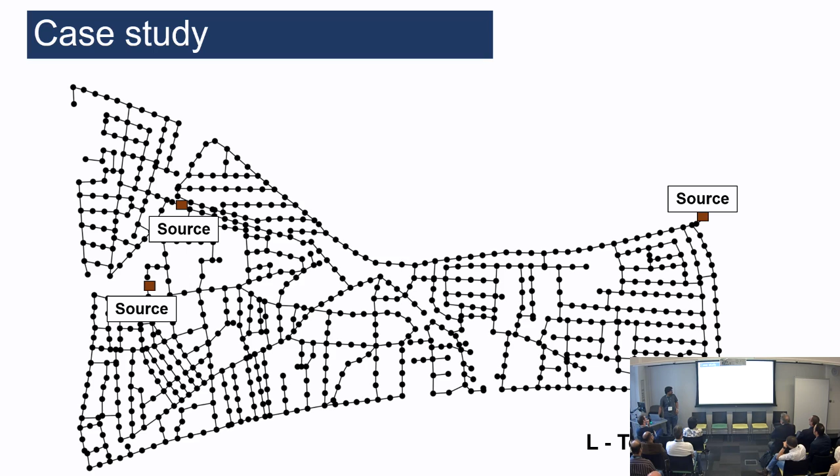And when I started using graph theory, I learned certain things which I didn't know earlier. One thing is called assortativity, which is how well nodes with similar features are connected with nodes having similar features. Usually water distribution networks are assortative. That means nodes with similar elevations are connected and fall into the same place. Likewise, one good thing that happened was, even for the sensitivity, the same thing repeated.

When I assigned the sensitivity values as node weights and then calculated the assortativity, the value was around 0.98, where the maximum value is 1. So we can clearly confirm it is a well assortative system.

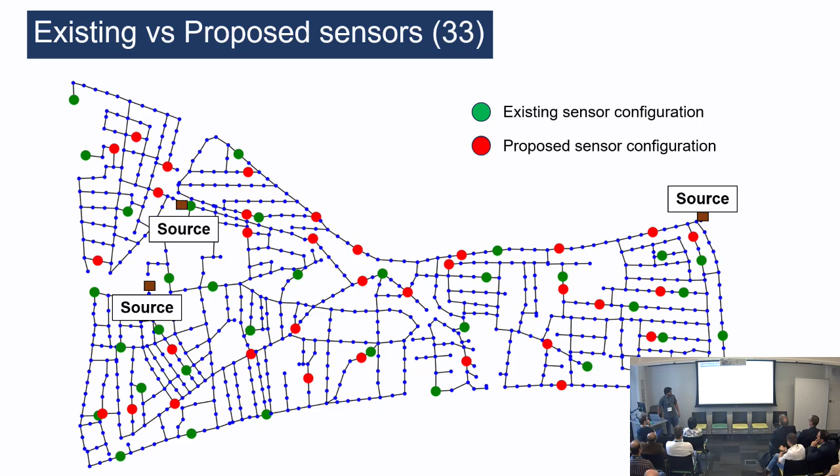And here are the results for the 33 sensors. To be on the same ground, they have 33 sensors and I propose 33 sensors. But my methodology actually avoids placing the sensors at the boundaries, since I'm more focused on the topological importance, unless they have higher sensitivities. If you see, the sensors in the top portion fall into the boundaries just because they have higher sensitivities.

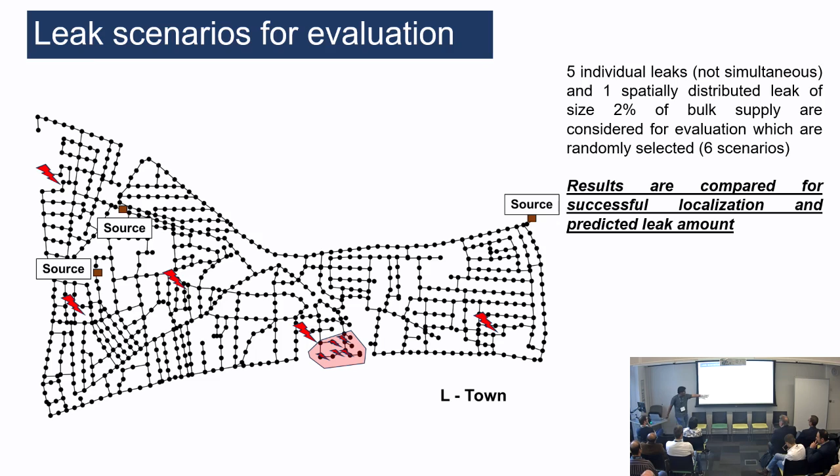And to evaluate both sensor configurations, we use some leak scenarios. I simulated leaks of size 2% of the bulk supply, and for that I selected 5 nodes at random. These are not simultaneous leaks but individual leaks, and one spatially distributed leak, which in this case are simultaneous leaks, where the total leak size is 2% of the bulk supply, and results are compared for successful leak localization and predicted leakage amount.

Just to compare, I wanted to see how far these leak locations are from the existing and the proposed sensor configuration. Out of the 5 individual leaks, 4 are closer to one of the sensors in the existing configuration rather than the proposed ones. So it gives an advantage to the existing sensors.

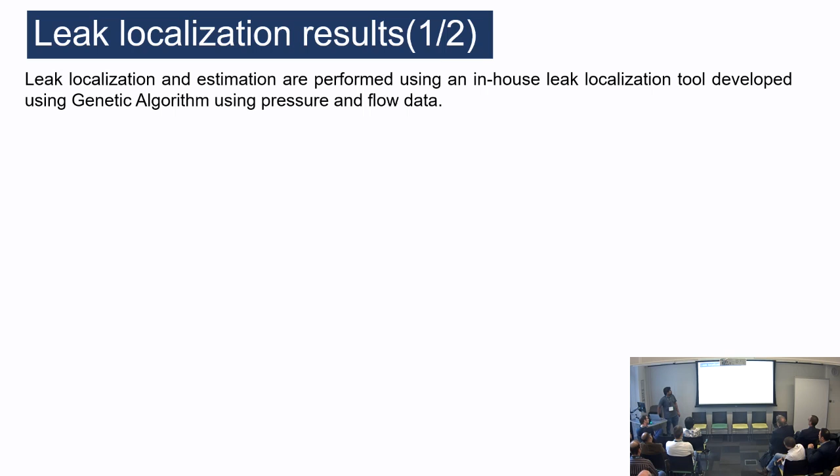And at this stage I was really stuck, because both the sensor configurations actually gave good results in leak localization, but I couldn't really see which one was beneficial. So I had to add a few lines of code and then see what is the estimated amount of leakage. That is where I saw a major difference.

Though all the leak events were successfully localized in both the scenarios, when we use the proposed sensor locations, the methodology was able to estimate the leakage amount closer to the actual leak in 5 out of 6 scenarios. In this case, when we use the existing ones, it predicted the leakage amount lesser than what it actually is.

These are not for a single iteration. For each scenario, we ran the leak localization algorithm thrice, and the mean values of leak estimation error were estimated for better comparison. So from this, we could conclude the proposed sensor locations performed better than the existing ones. In the later stages, we would want to reduce the number of sensors, as Professor Raziyeh mentioned.

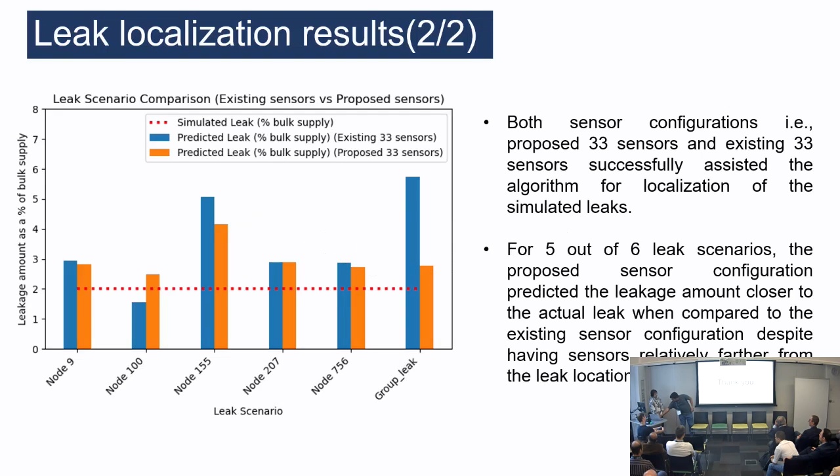It has many dependencies. In this case, since the major focus is only comparing the different sensor configurations and not on leak localization, I did not consider any demand uncertainties. The major assumption is that all the demands are the true demands and only leakage has occurred. Thereby, I could localize leaks down to 1% of the bulk supply using 33 sensors. But the relation between the number of sensors and the minimum leak it could detect, I really have to establish in the later stages of the work.

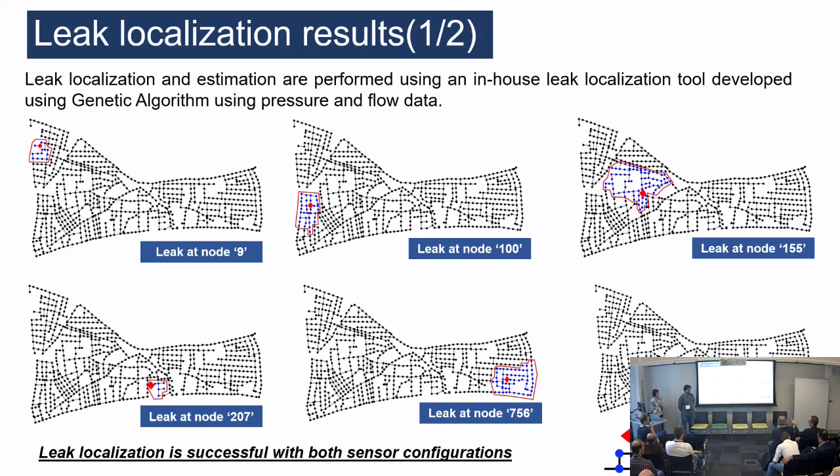First of all, I'd like to commend you on the approach, because not many researchers have treated sensor location design and leak localization as one problem, though they are related; they would first optimize the sensors and then look for localization. So that's really good. And also, if you can go back to the slide where you have 3 objective functions, or 3 measures that you're looking into. Yes. So if I look into the second, my simple understanding is that the 2 measures there are related to the distance.

Have you considered looking into resistance as well? Because that's what betweenness could have, and it may give you a better relationship between points. I'm sorry, Professor. Flow resistance. Oh, flow resistance. Because pressure is related to the resistance in the pipe. I didn't really consider that, Professor. The reason why I did not use that, you mean the energy losses?

Yeah. In the literature, I have seen one or two activities using that, but there are challenges, because in case we don't have a well-calibrated model, the spatial and temporal variations in demand, and the timestamp when we use the model to get the sensor locations, every time we run it might give different results. To get some consistency in terms of spatial coverage, I went with one standard, which is length, instead of the head loss.

So you think that the length is better measured than the hydraulic loss? Hydraulic loss. For consistent results, okay. I use that. Okay, thank you. Any other questions? If not, thank you very much.

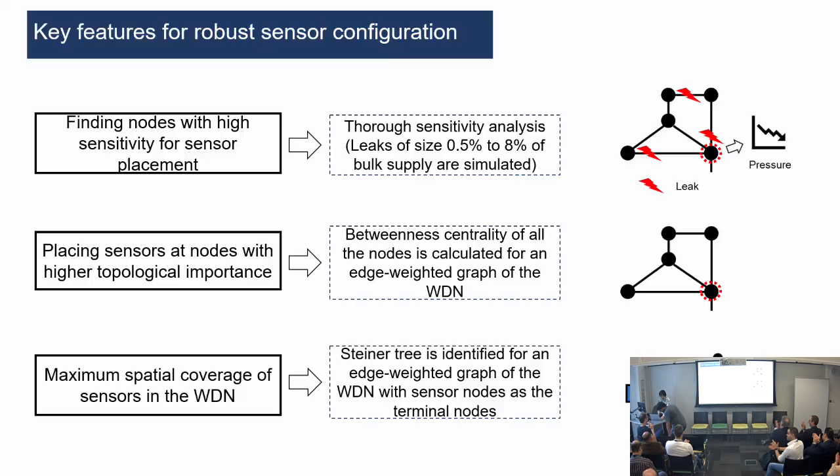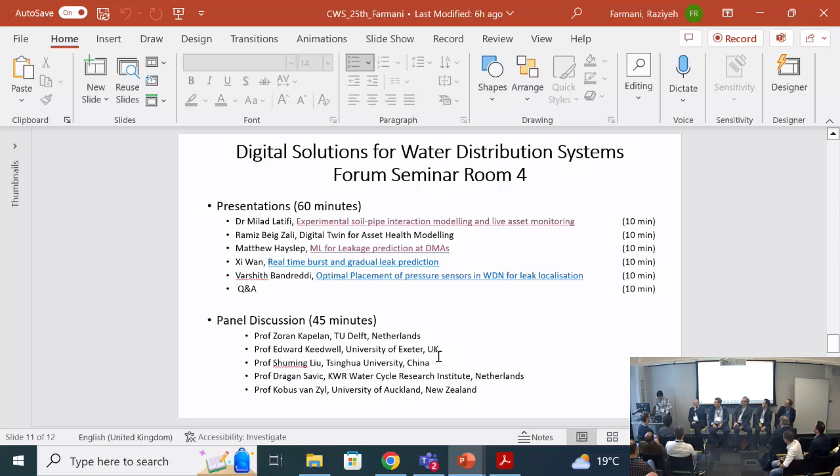So may I ask all our panelists if you could please come to the front. Sorry. There you are. Lots of questions. I was supposed to choose. A lot of questions, so you have to answer. Yeah, thank you very much for agreeing to. If you like, you can bring the chairs forward. Thank you very much for agreeing to do this panel discussion for this session. The screen, please. Sorry. Shall I close it? When I'm doing, it's going to another slide. I don't know what is happening. Okay, perfect. So I'll open the floor, please, if you have any questions.

Well, can I just say before you start, I was so impressed with the work being done. Well done, everybody. So much good work going on in the center in this area. Thank you.

I think it might be better if we start with each panelist, your views on asset management, future of asset management, how AI or other new technologies may influence how asset management is going to be done in the next 5-10 years. Shall we start with that question while participants think about their questions?

Yeah? Kobus asked the most questions, so he should be the first. Okay. Kobus, are you happy to start? Yes, I have no idea. We'll call this session Drop Your Friend In.

I mean, what I tend to work on is the detailed understanding of leakage behavior and asset deterioration, and I think it's going to have to be a combination of understanding the deterioration processes and using big data and AI to combine it. And the better we can understand how pipes deteriorate and identify that, the better we'll be able to use asset management. So it's going to have to be both. And I think one of the biggest obstacles we have is good data.